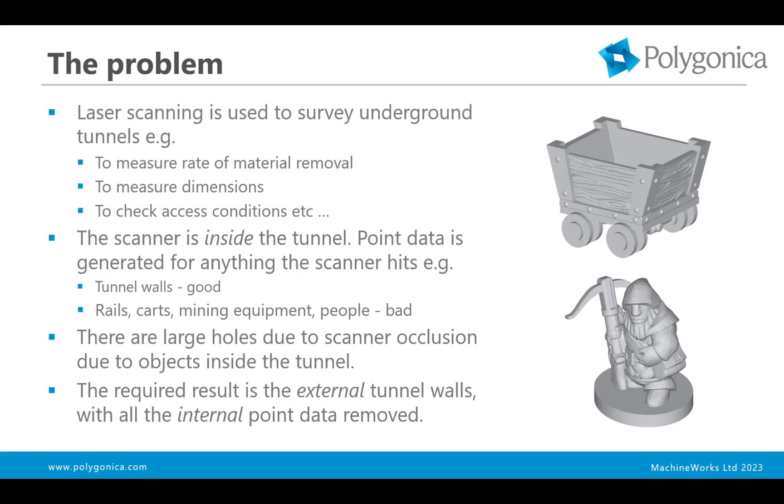What it does is, imagine a large balloon that's shrunk around the outside of the mesh that's been created from the point cloud. And as a consequence of doing this, very large holes get filled, and small holes as well. So the holes get filled, and perhaps more importantly, because it's shrink wrapping from the outside, all the internal data gets excluded. So it stops at the outside points and doesn't go further in.

So on the left, you can see this is a set of tunnels we've constructed based on some points that we created using a scanner, and I'll show you how we did that at the end of the video. And then on the right is the shrink wrap, which is shown transparently, so that you can see in it, and you can see that it's clean inside. There is no sort of noise inside it.

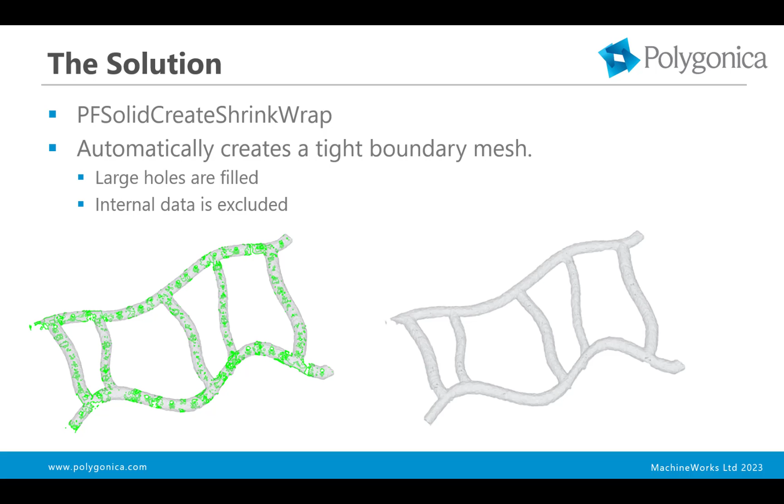And this is actually an example of a cross-section through the actual original tunnel reconstructed scan and the shrink wrap. So on the left, the grey polygons are the shrink wrap, and the brown polygons are the original scan. And you can see inside the tunnel there's lots of noise where the scanner's hit some carts and things like that. You can also see light blue areas where there are holes due to scanner occlusion, and those have been filled in by the shrink wrap.

And then the actual curves of the two cross sections have been drawn. So the blue curve is a cross section through the shrink wrap, and the red curve is through the original tunnel. So you can see the red curve has gaps, whilst the blue curve is continuous. But you can also see that the blue curve is really very tightly coincident with the red curve. So this is done to a reasonably high accuracy. It's certainly high enough for a normal analysis of things on this scale.

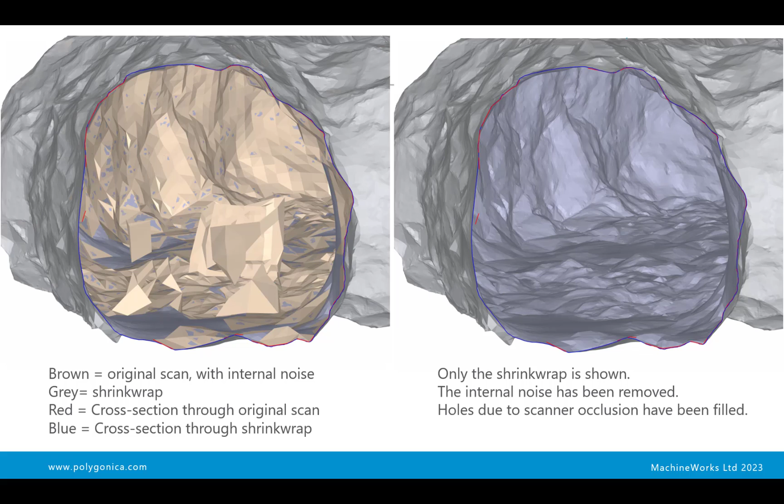And then on the right hand picture, I've just turned off the display of the original tunnel mesh, so you can see what the shrink wrap gives you. It gives you a clean internal surface there.

So the overall workflow here is, scan the tunnels, which requires moving the scanner through the tunnels. Then you do the normal kind of filtering and sampling of point sets. You need to align the point sets. You need to merge the point sets. Polygonica can help you with all of this, or you can use your own software to do it.

And then at the moment, the shrink wrap only works on polygon meshes, not on point clouds. So you need to create a polygon mesh from the points. And again, Polygonica can do that for you. And that's how we've created the meshes in this case. And then finally, shrink wrap the polygon mesh.

Now, the shrink wrap function, PFSolidCreateShrinkWrap, has quite a number of different options. You can configure it and control it in different ways. But I think the most important one in this case is a tolerance. In effect, if the tolerance is tighter, then the wrap is closer to the original; it's on average within that tolerance. So that's great. You get a more accurate result, but at the expense of creating more polygons.

And anyone who's dealt with these meshes from mining tunnels knows that they're very, very big. You can also loosen the tolerance, and I'm going to do that in the live demo with a slightly looser tolerance, and then you'll get a wrap that's further from the original, although potentially still quite usable. And you'll get fewer polygons.

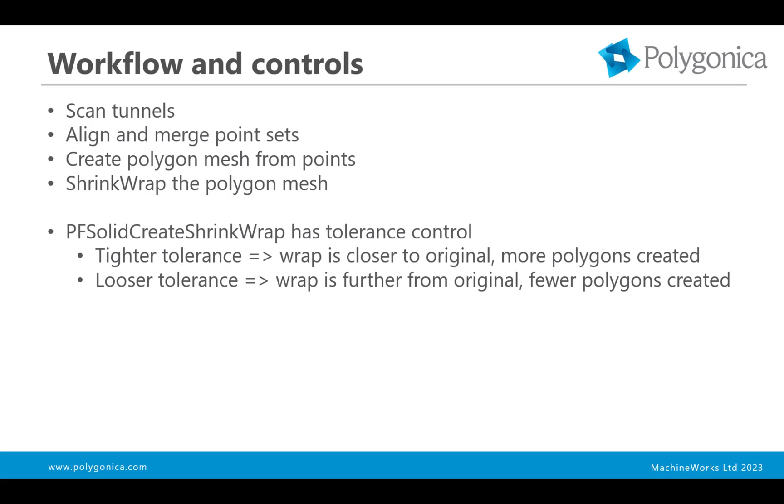So, with a looser tolerance, you can do a kind of interactive workflow. With a tighter tolerance, you might want to have more of a batch workflow where you set the thing running and you come back in 10 minutes, half an hour, that sort of thing, and you've got a very tight, accurate wrap. Okay, so let's go on to the live demo.

Okay, so what we're looking at here is Polygonica demo, which is a demonstration user interface that we've built internally to demonstrate the Polygonica libraries. So it's not available as an end user application. You can't go and buy it anywhere. It is literally just a demo program.

And so what I've loaded in is this faked data of some mining tunnels that have been scanned and then a mesh made from them. And it's faked because although we've worked with companies on this project, they won't let us use their data publicly because it's their customers' data. So we've created some fake data that looks reasonably like what they get. Obviously, typical scans can be a lot bigger than this, a lot more polygons.

Okay, and you can see these green highlights are open edges, so it's basically where there's gaps in the data. So I'm just going to go straight onto the Shrinkwrap because it takes a minute or so, so I'm going to set that going. So you can see Shrinkwrap has lots of options. I'm going to choose outside wrap in this case, and I'm going to set the maximum error to 0.1. I'll talk about these in a second. I'm just going to get it going.

I'm going to allow tunnels in the wrap, cap tunnels in the solid, and set a minimum diameter of about 10, and I'll just click that and get it going. So it's now doing the wrap, and you can see there's a progress bar on the bottom right. So let me explain some of these options.

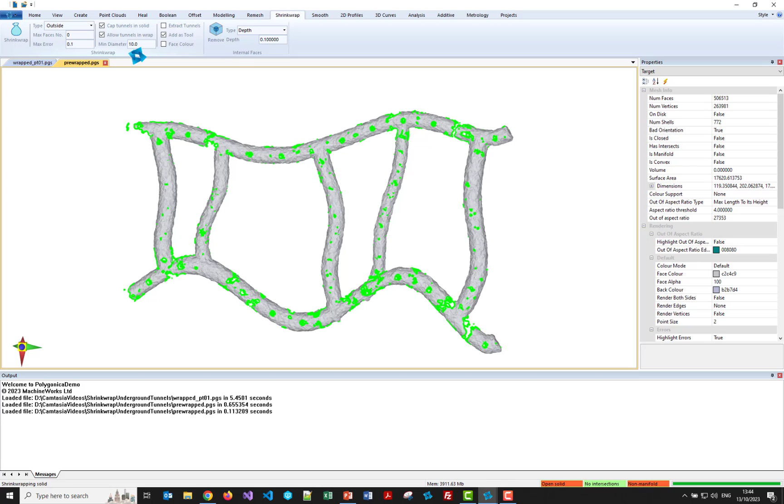Allow tunnels in the wrap means that the wrap isn't going to join these big regions between the tunnels. It won't cover them over. And then this minimum diameter parameter is the minimum diameter for what it considers to be a tunnel that it should allow, and a tunnel that it's going to cap the end of. So I've set that to be about 10 meters, which is what I'm guessing the diameter of the tunnels actually is. So that's now done, and you can see, okay, we've now got a closed solid.

All the green edges have gone. If you look down at the traffic lights down the bottom, it's now closed, no self-intersections, it's manifold. It took about 52 seconds, and then we ran self-intersection fixing afterwards. So it took about 54 seconds.

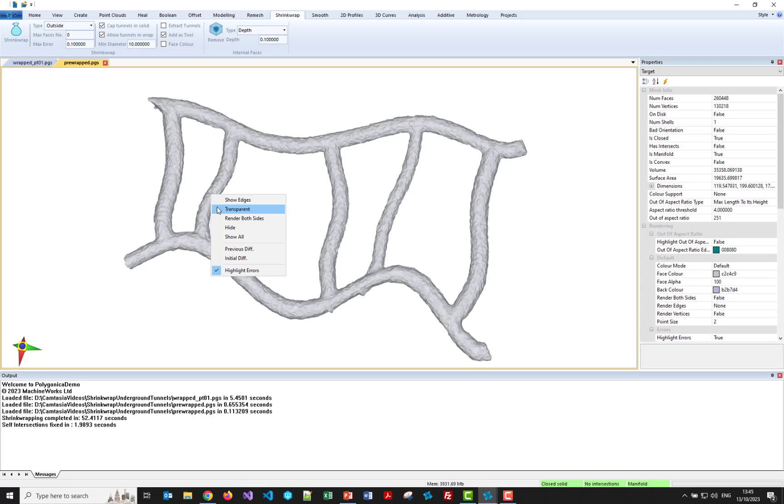So we're talking a sort of interactive workflow here. I think if you're doing it for real data, you probably have more of a batch workflow possibly. And then if I make it transparent again, you can see there's no nasties inside that. It's clean. So what I'm going to do now is load in the actual original wrap as a tool.

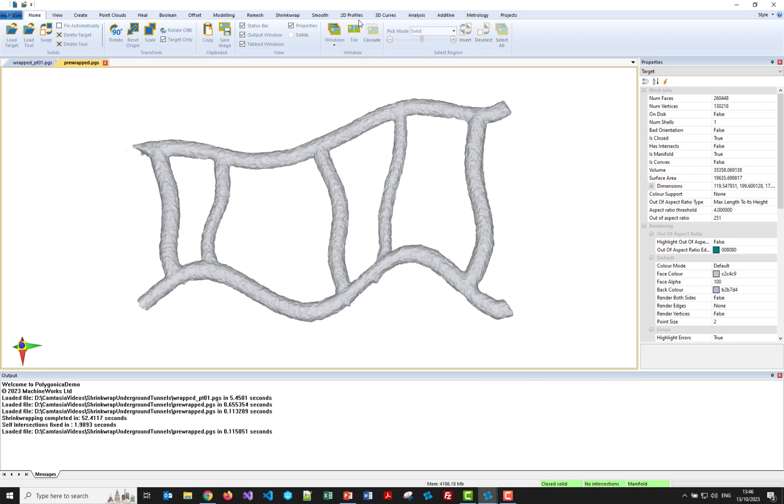So I'm going to load them side by side, and then we can actually look at a cross section through them. So that's loaded. Can't see it. I'll just hide the main wrap, and then you can see that's the original. I'll show all. Okay, so now we'll do some cutting planes. So this is just an OpenGL clip plane. Let me just change the orientation.

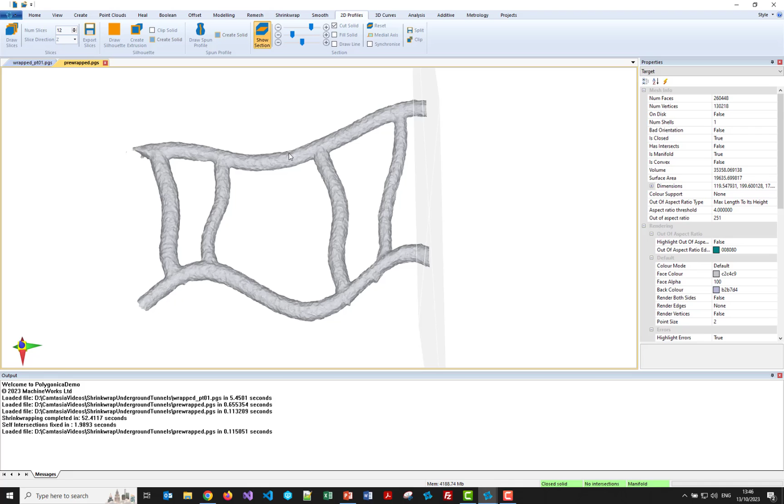So make it, there. And let's move it out. I think there's some internal data around here, so let me just spin that around. There we go. Oops, let's look at it that way up. I think just seem to have a kind of a base. And yeah, okay, so

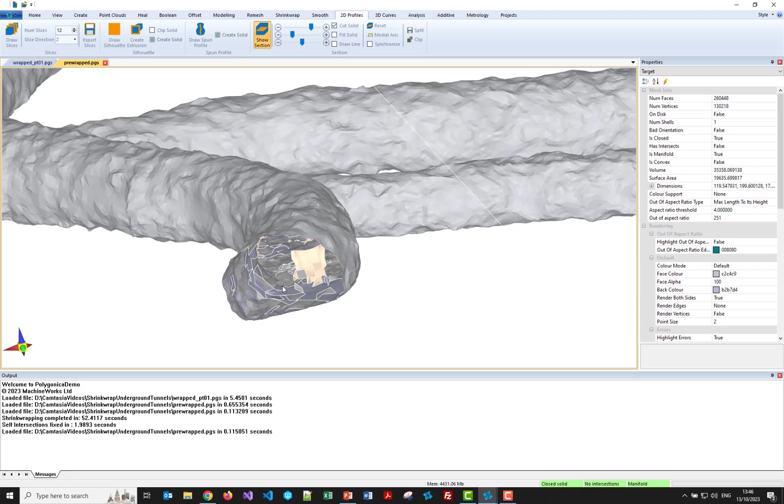I'm just going to turn on, we're not rendering backface edges here, so let's just turn those on so you can see properly. And yeah, I'm having some problems with the graphics because I've got another larger example loaded, but you can see here, let me turn on the draw line. So if I zoom in first of all and look at how far apart they are, well, I said the tolerance was about 10 centimeters, and that sort of seems probably about right.

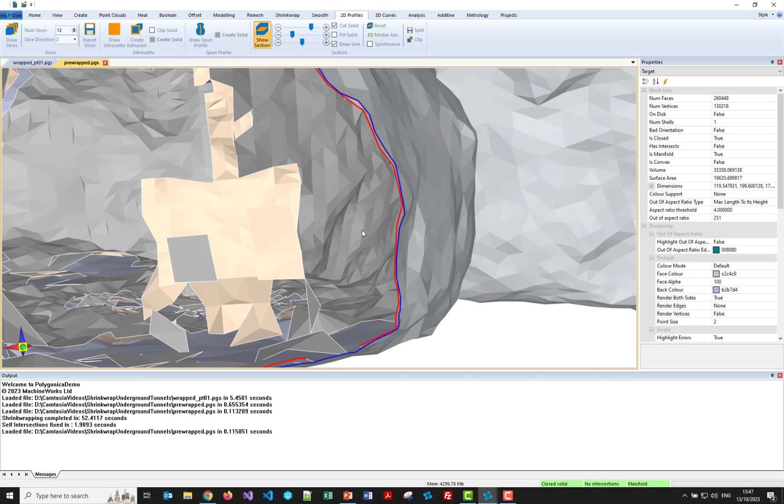The red line is the original scan, and the blue line is the shrink wrap. And then you can see that we've got this internal data, which is one of the things we're trying to get rid of. So let me just hide that, and now we can see there is the actual clean wrap. So we've got a nice clean inside to that. So really that's what we're looking for.

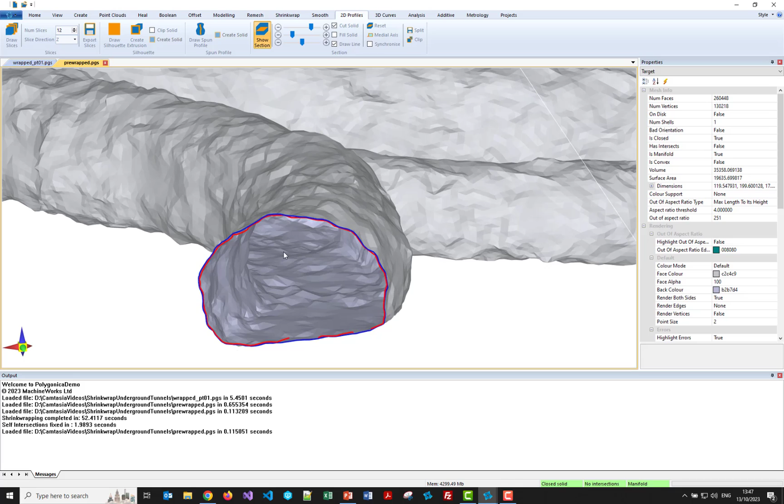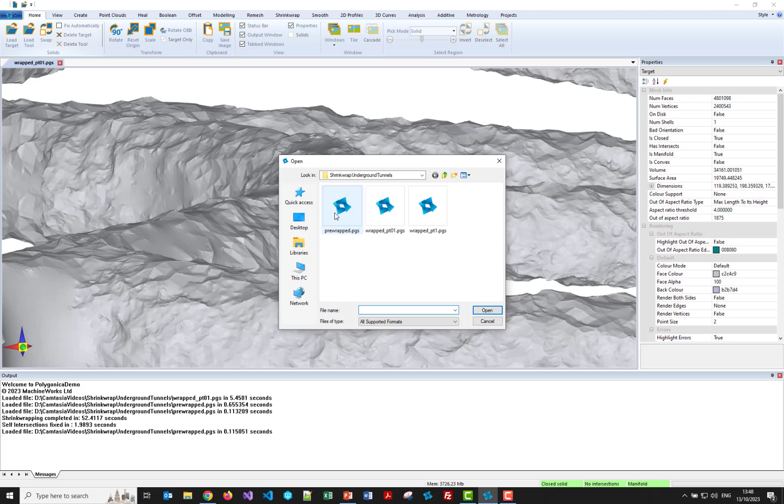Now let me kill that one, I think, and then just do the same thing with a wrap that's been done to 1 centimeter tolerance, which you can immediately see. I set a limit of this of 5 million polygons, although I don't think it's quite reached the limit. So I'm going to do the same thing, load in the tool. I'll load in the original wrap as the tool. Has that done that? Yeah, that's done that.

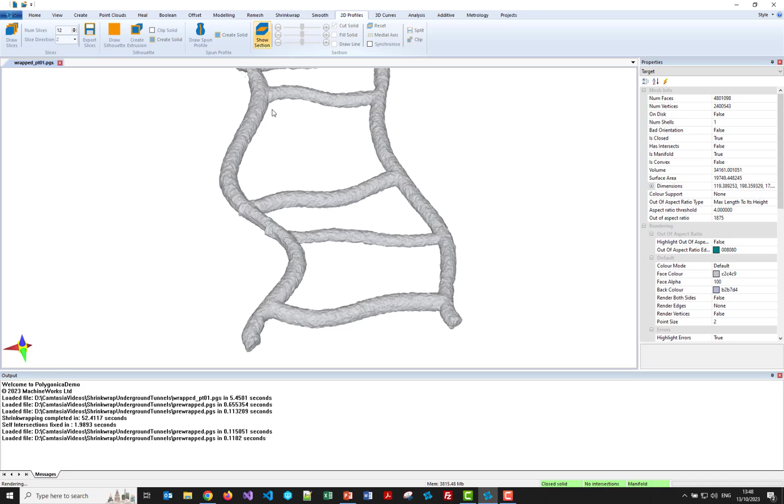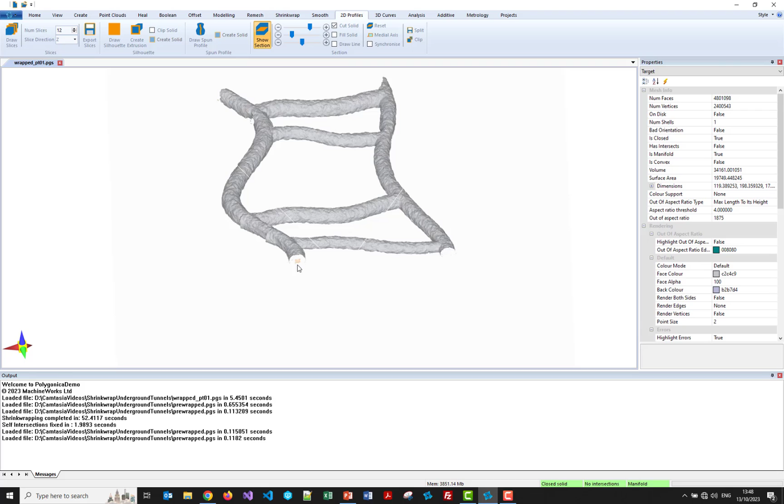You can see the brown thing there, and then let's try, and I don't think I'm going to get the same profile, so let me zoom out while I do the section plane. Yeah, it takes a bit of time to set that up, and there we go. I must add a better way of positioning section planes to this at some point. But there we go. I think, was it that one, or was it a bit further on? No, it's that one. Here we go. There it is. Yeah. So there's some of the internal data. You can see it there.

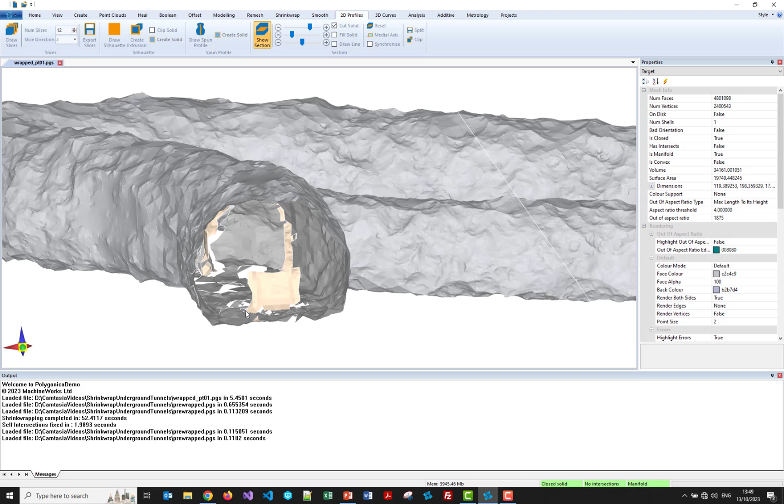And again, I will turn on rendering both sides. So you can see it takes a little bit of time. I mean, Polygonica comes with a graphics engine, but it's far from optimized. Most of our customers actually use their own graphics engine, which would probably have faster updates than this. Okay, so there's, you can see, like we saw before, there's the internals. Let me put the section lines on.

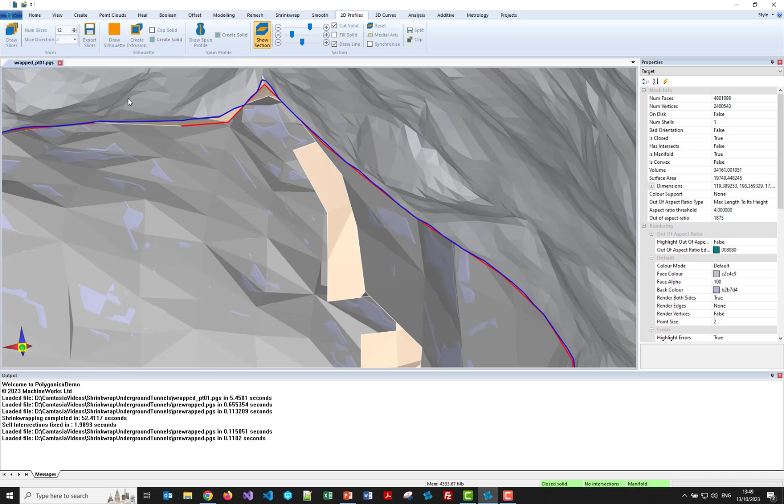This time, if I zoom in, you can see the blue line is very close to the red line. So what we've got here is a pretty accurate wrap, and you can also see why the red line stops. The shrink wrap has actually closed the gaps. So if I hide that, you can see that there's a gap that's been closed there, and we've got a nice tunnel. It's all clear inside.

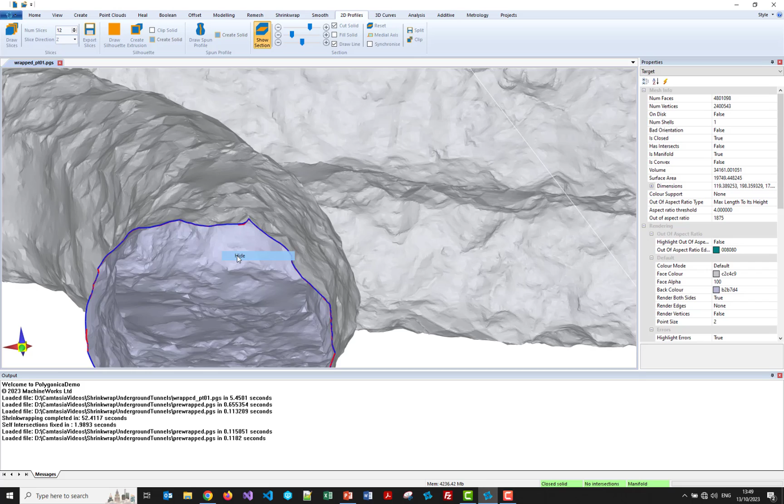For the final thing I'll just hide that one, and actually no, it's not going to work. Show all of them and hide the wrap itself, and then you can see that, for example, here this is where the scanner was, so it hasn't scanned above itself particularly well. Again, this is our faked scanner. Hopefully a real world scanner operator would do a better job than that.

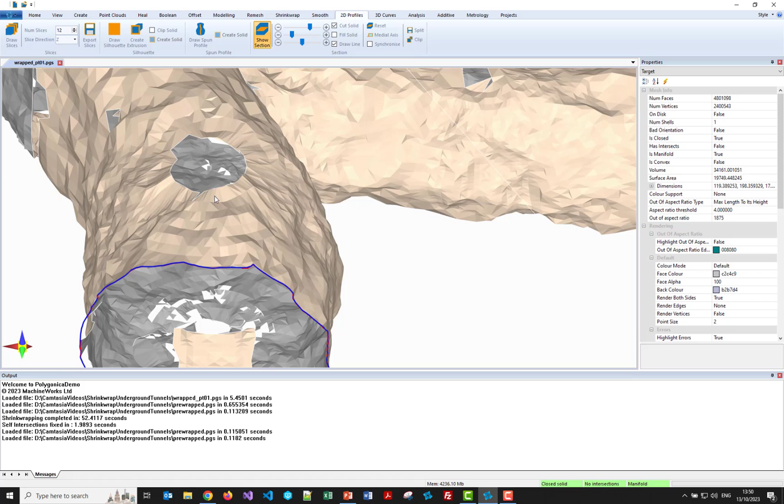But again, if I show all and hide the original, you can see that that's been nicely closed. Okay, so I think that's the general principle.

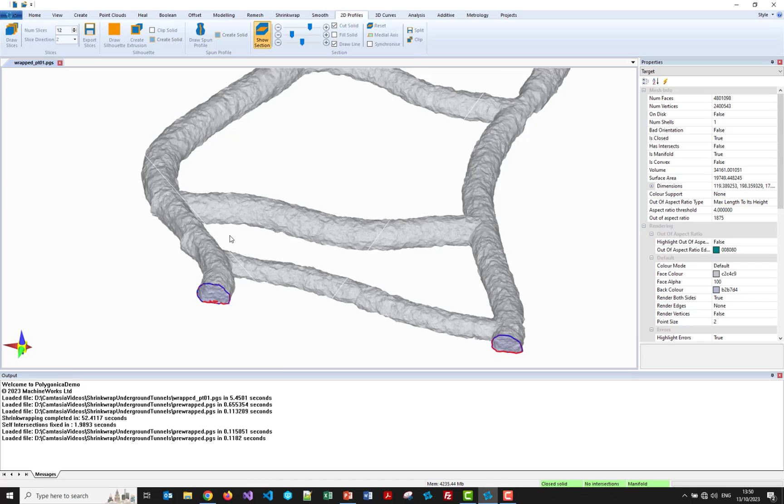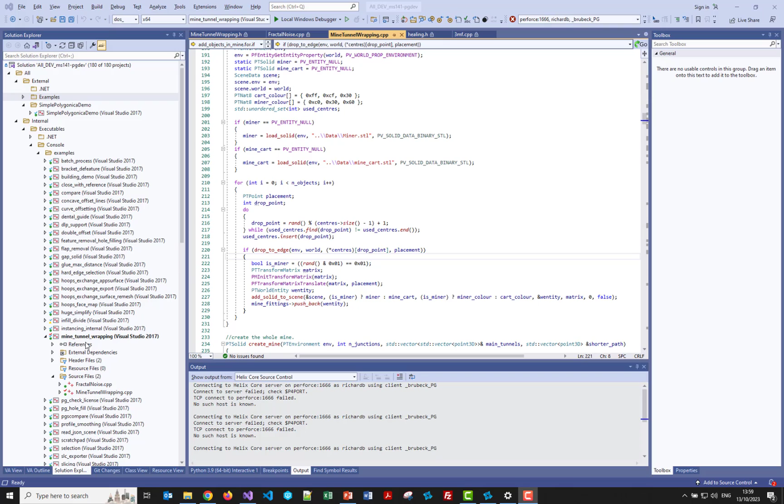Just for curiosity's sake, I'm now going to show you how we actually created this data, because it highlights some other functionality within Polygonica. Okay, so here we are in Visual Studio, and I'm going to run the mine tunnel wrapping example, which is what we use to generate this data in order to show you the wrap. So it's a little console project. I'll just make it a bit bigger, I guess.

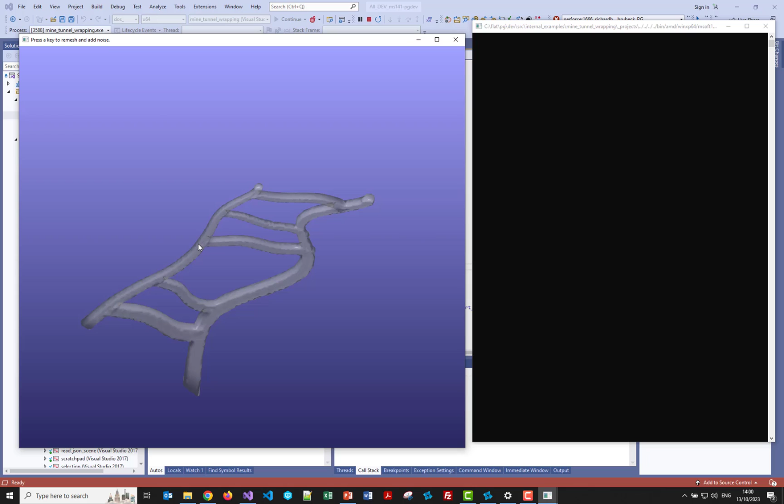Maybe let's make that a bit smaller, and then it says press a key to create tunnel map. So first of all, it creates a sort of random shape based on a random seed of tunnels and stuff. And then it adds some noise based on a fractal noise algorithm. So it just tries to make that look like a real tunnel.

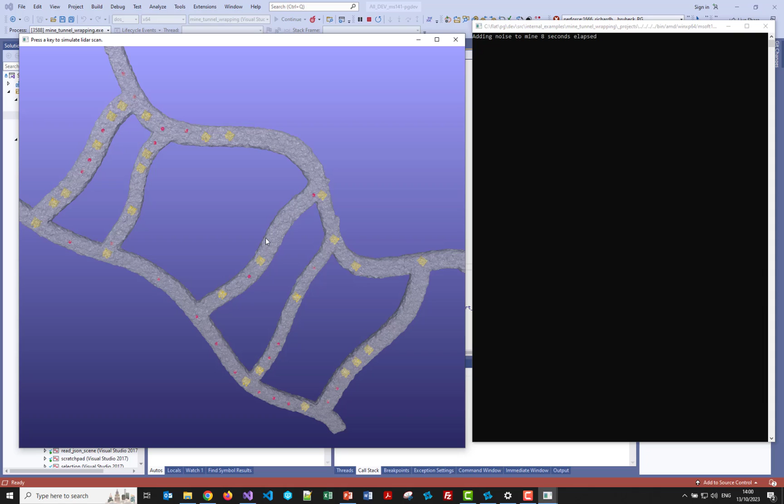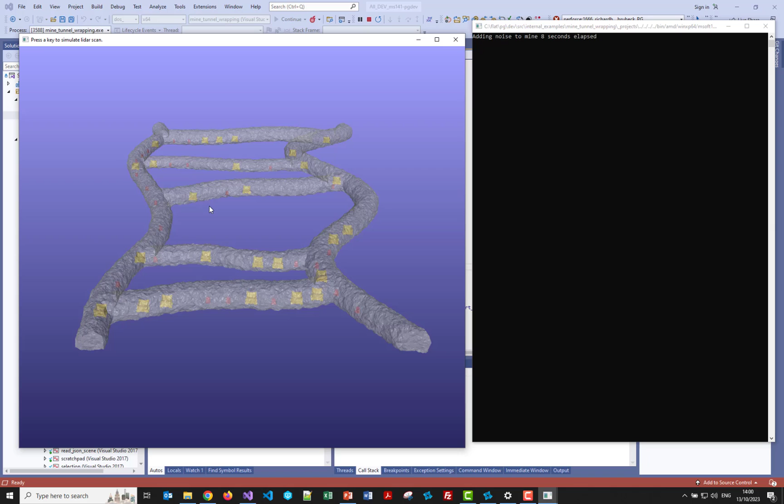And that's done that. If I zoom in here, it's tried to make the tunnel look like a real underground tunnel. And we've added the mine carts and the strange guys with crossbows that you obviously find underground in mines that I showed in the presentation earlier. So those are the things that are going to cause scanner occlusion and also internal noise. So those are the things we're going to get rid of.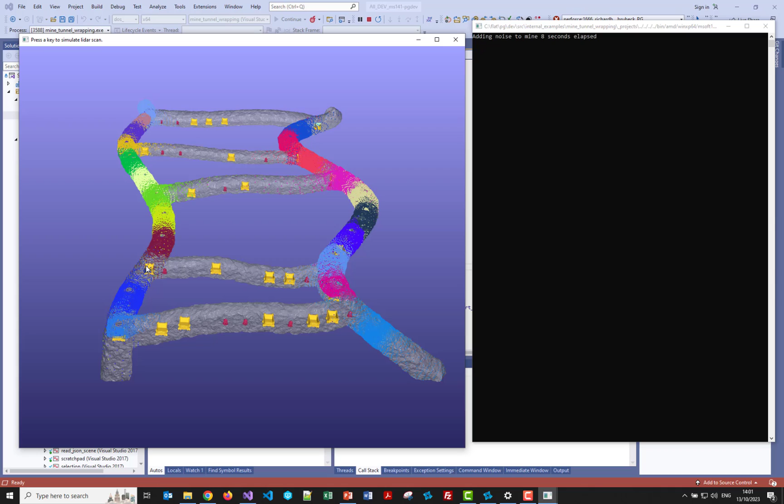So I'm double clicking again, and it's going to simulate a LiDAR scan. So we've actually created a virtual scanner, and that's being moved along the tunnel, creating different point sets. So in effect, it's doing ray casting, intersecting with the tunnel and generating the points as a real scanner would, and it suffers scanner occlusion just as a real scanner would.

It can run in parallel, but in order to show you how we've done it, I'm just running it in serial. So I'm probably going to pause this in a second and just cut towards the end like they do on Blue Peter, if anyone's familiar with that British TV show.

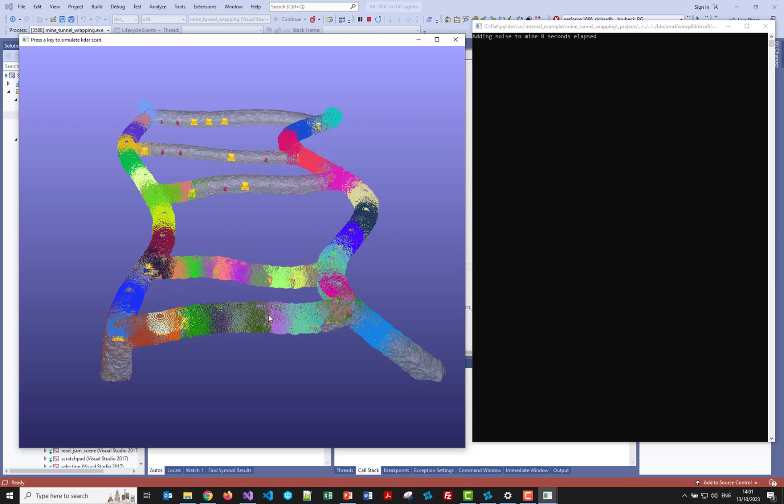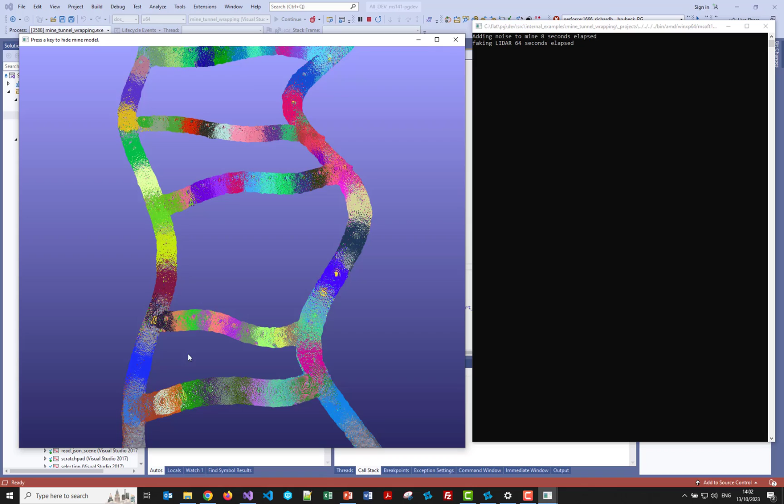Okay, so it's now faked that LiDAR scan. So we've got a nice bunch of point sets that we can align. Well, they're actually probably pretty well aligned, to be honest. But from that, we can triangulate them. So Polygonica is now using its point cloud triangulation algorithms to create a polygon mesh from it.

The Shrinkwrap can be adapted to actually shrink wrap from point clouds directly rather than from polygons. We've just not done it yet. So if that's something that's really dear to you, then feel free to get in touch and we can talk about it.

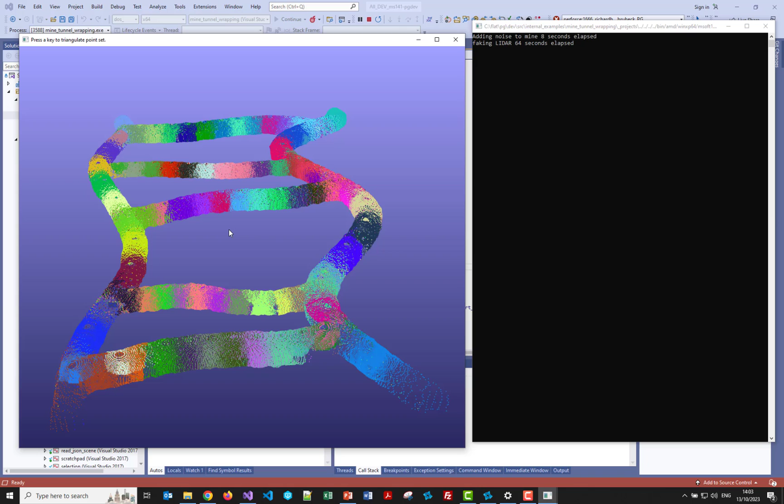Now, I'm not sure quite how long this takes. Again, I might just shorten the video, or I might not. It depends. Oh no, I hadn't set it going. Now it's going. Oh dear. So I'm guessing this might take 30 seconds to a minute. I mean, it's a reasonable size point cloud. Oh, okay, even quicker than that, 14 seconds.

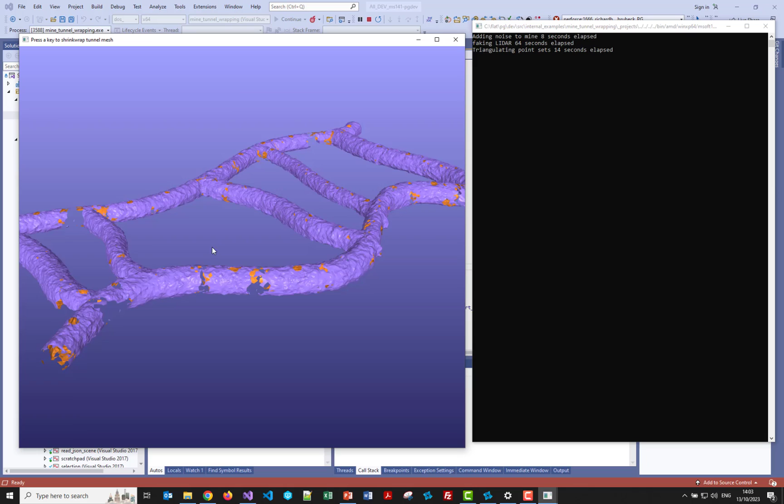Okay, so now we've hidden the points, and this is the actual faked underground scan that we then used for the shrink wrap process in the previous video. So yeah, possibly a bit unfortunate we have to do this for our demos, but we'll be creating quite a lot more demos based on this fake laser scanning process, just so we can show some of the cool things that Polygonica can do. So yeah, watch this space.